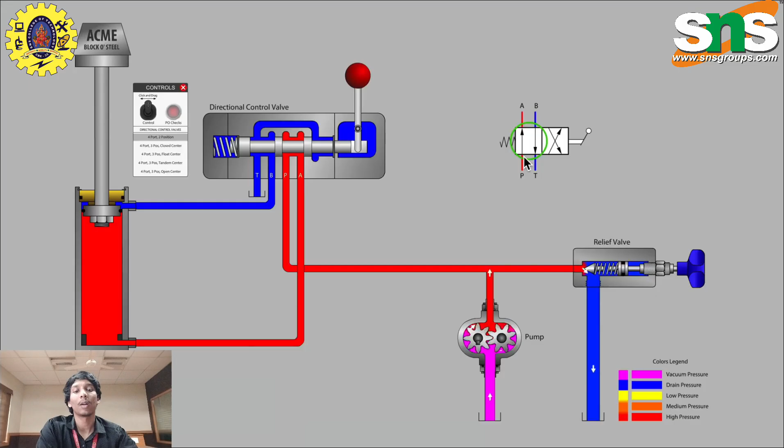So, coming to today's session, we are going to have a look at directional control valves, specifically 4-port directional control valves that feature a blocked P port in the center or neutral position. A 4-port directional control valve typically has 4 labels: P, T, A, and B. The P port is for supply from the pump, T port is for return to the tank reservoir, and the A and B ports are typically known as the work ports and are connected to the cylinder.

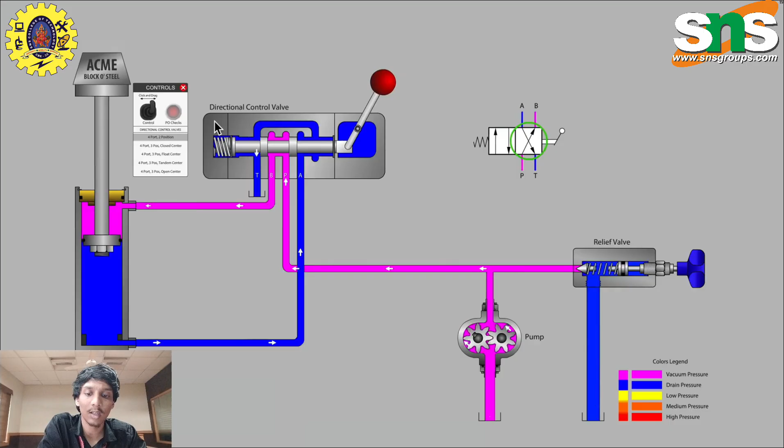Let's get started with the 4-port, 2-position valve that does not have a center position. On the symbol you see P to A port to extend the cylinder and P to B port to retract the cylinder on the actual valve.

In the video you can see the cylindrical spool sliding inside the cylinder valve bore. The spool has larger diameter areas called lands and smaller diameter areas called undercuts.

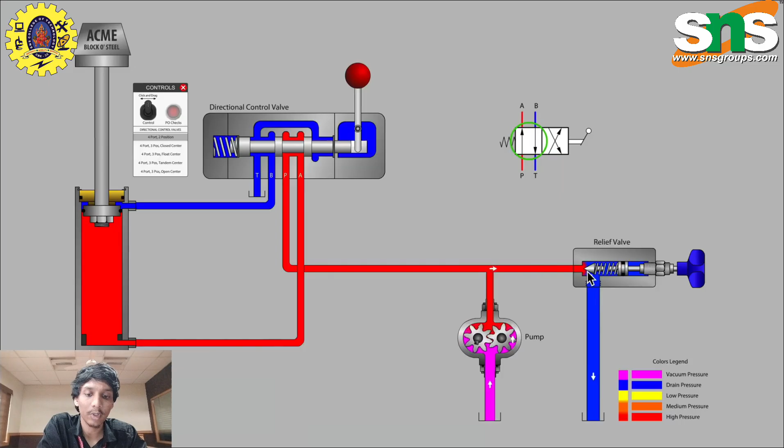This valve, with its 4 ports and 2 positions, is popular enough to extend and retract a cylinder, but it does not allow the user to stop the cylinder in mid-stroke. The spring inside the valve returns the spool to the position when the lever is released.

Notice that the relief valve takes care of limiting maximum system pressure whenever the cylinder is deadheaded against the fully extended or fully retracted position.

In the video you can see the change to a 4-port, 3-position valve. In the symbol, you can see that a center position has been added along with a second spring, meaning that the valve is spring centered.

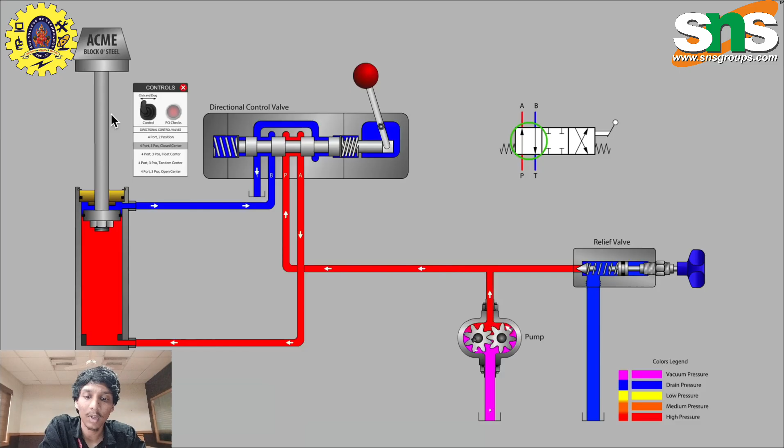Notice that the P port is blocked when it is in the center position, so the relief valve is limiting system pressure. The A and B ports are also blocked, making this a closed center valve.

The mechanism of the valve spool shows that the lands are blocking the A and B ports, and the P port is aligned with the undercuts on the spool, but flow cannot move to the other ports. Therefore the P port is blocked, as you can see in the video.

The A and B ports are available on both sides of the valve in the animation, but again are not connected to any other port at that time, as you can see in the animation.

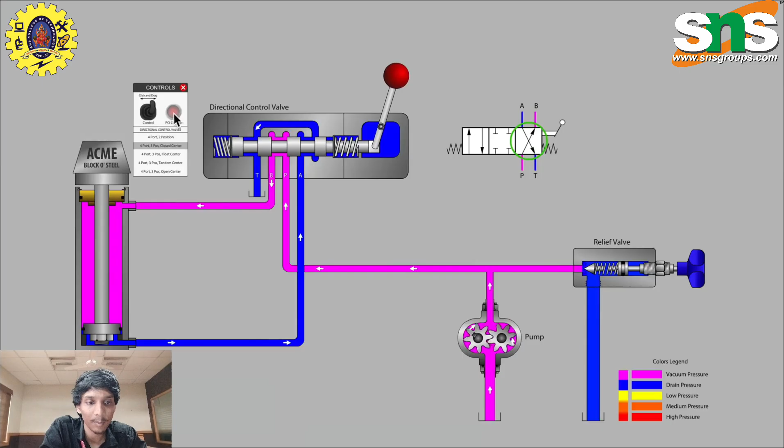Activating the valve shows that we can send P flow to A to extend the cylinder, or P flow to B to retract the cylinder. Releasing the handle shows that we can in fact stop the cylinder in mid-stroke. This is a common feature used in many hydraulic systems. It is especially popular for horizontal cylinder installations, but we can also find it used in vertical installations, as shown in the animation. So the valve seems to perform just fine, but can you imagine what happens

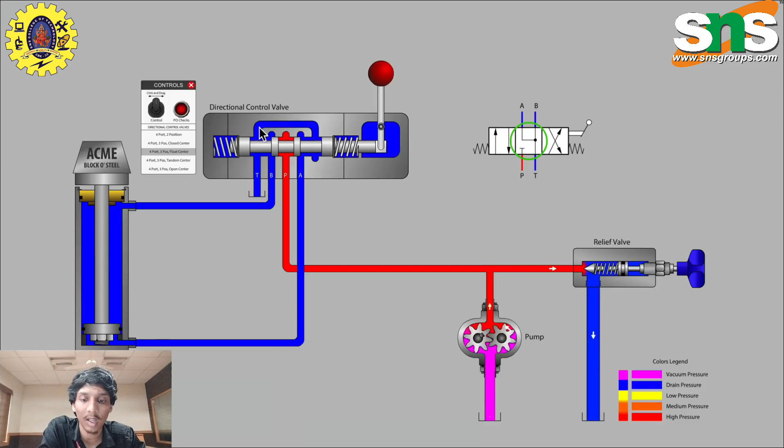when the cylindrical valve spool moves thousands of times through the same valve bore? Here I continue to retract the cylinder. Releasing the handle shows that we can in fact stop the cylinder in mid-stroke. This is a common feature used in many hydraulic systems.

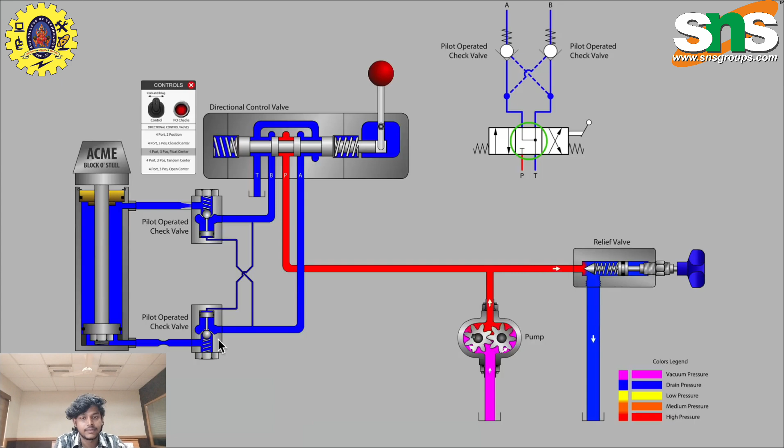It is especially popular for horizontal cylinder installations, but as we'll soon see, not great for vertical installation. In this animation, the valve seems to perform just fine, but imagine what happens as the cylindrical valve spool moves back and forth many thousand times through the same valve bore. Internal valve leakage will develop, and we'll find the cylinder slowly drifting downward whenever the valve handle is in neutral.

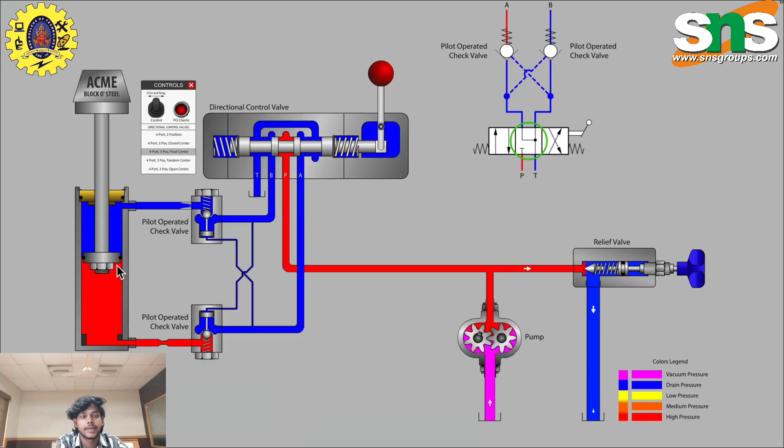Now let's look at the valve typically referred to as a float center valve. Just as before, the P port is blocked at the center position, however the A and B ports are now connected together. Notice that the lands on the spool have been machined back, allowing the A and B ports to connect to tank during the center position.

If you are watching this cylinder, you'll notice that it falls all the way to the bottom. The float center literally leaves the cylinder floating freely. Believe it or not, this valve center is quite popular for vertical cylinder applications.

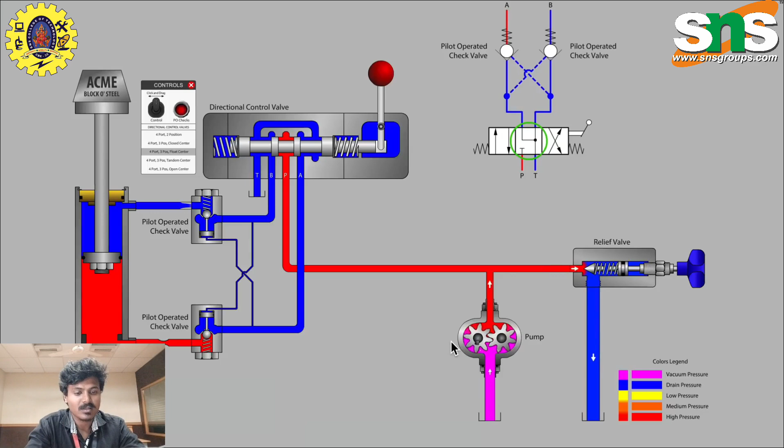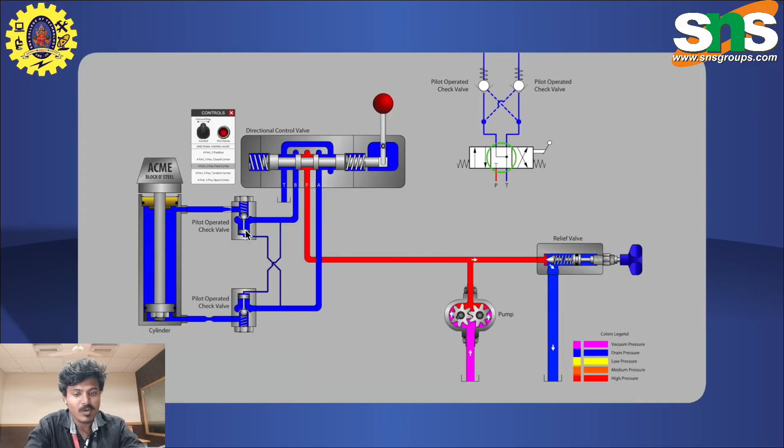You need to add pilot operated check valves in order to hold the cylinder mid-stroke. The small diameter pilot lines are not continuous flow lines; they merely provide a tiny fixed amount of fluid and the pressure needed to operate the pilot piston.

When the pilot piston is extended, it allows reverse flow through the check valves. Ball and seat style check valves are usually considered much more reliable, leak-free valves, as the main components do not wear against each other.

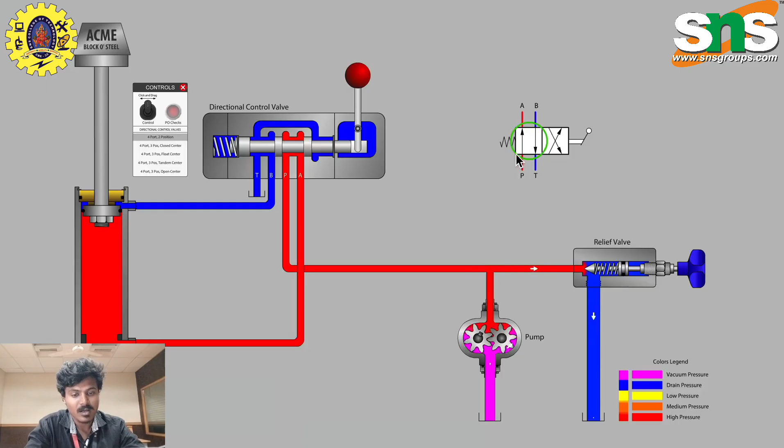With the float center valve, it's most desirable to make sure that the pilot lines are completely vented to the tank to allow the springs...

...completely vented to tank to allow the spring inside the check valves to close.

The check valves completely hold the cylinder mid-stroke in both of the 4-port 3-position directional control valves we studied, the closed center and float center, where the P port was blocked. The use of these valves is typical of what's referred to as a closed center hydraulic system. In many cases, our gear pump would be replaced by a pressure compensated variable pump in order to avoid excess pumping over the relief valve.

In another video, we'll cover the tandem center valve and the open center directional control valve. That's all for this time.

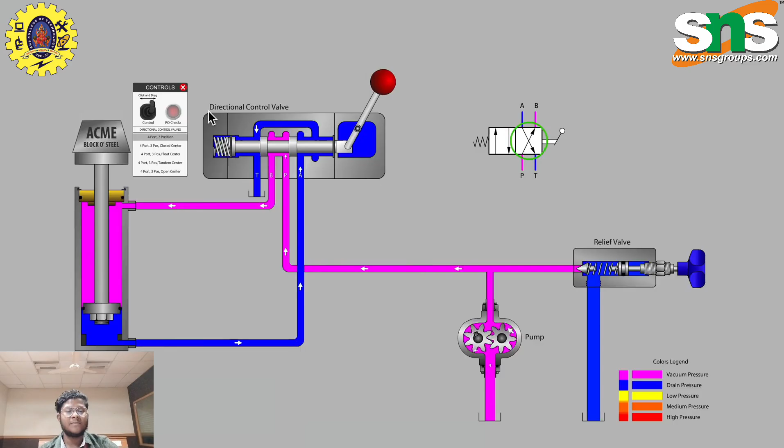Previously, I mentioned the principles and definitions of directional control valves. Now I'll explain the advantages, disadvantages and applications of directional control valves.

The advantages are that directions can be controlled easily, such as the forward movement and reverse movement of hydraulic cylinders, and it is a simple operation which can be easily understood. The response is very fast, the design is very compact, automation is easily possible, it provides high efficiency, and there are multiple configurations available.

The disadvantages, however, are that there may be leakage, and maintenance is required. The advanced types are very costly, so you cannot always provide a cost-effective solution. There is also pressure loss and sensitivity to contaminants.

Applications of DCV include hydraulic press machines, industrial automation systems, excavators and construction equipment, material handling equipment, injection molding machines, pneumatic systems, machine tools, etc.